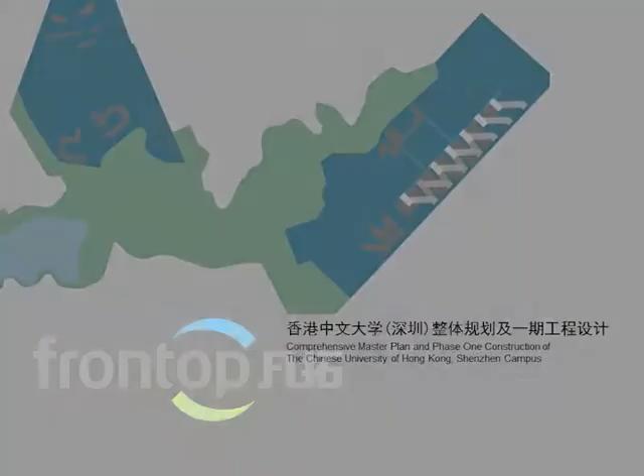This is the presentation for the Comprehensive Master Plan and Phase 1 construction of the Chinese University of Hong Kong, Shenzhen campus. Our aim was to design a campus that reflects the unique culture of the Chinese University and its values.

Our understanding of the Chinese University is that it has a very strong cultural heritage, a culture of college community and communication, and an ecological campus. In addition, we wanted to introduce a culture of creativity and interaction.

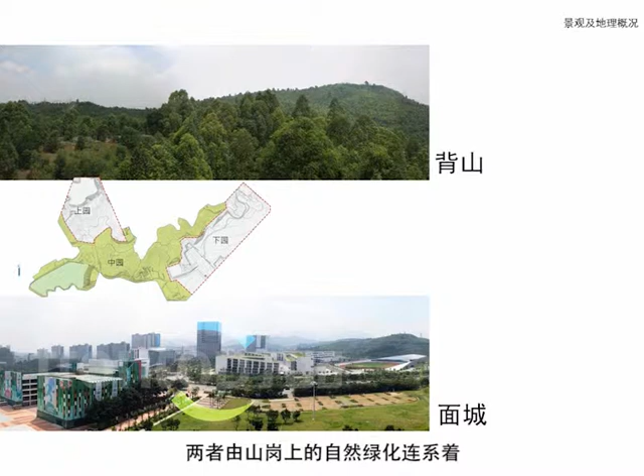The site and its terrain naturally allowed two campus zones, which are fused together with the landscape. The lower campus on the right is backed by hills, and the upper campus on the left sits on top of the hills. The lower campus interacts with the city, and on the other side is surrounded by the serene, natural hillside.

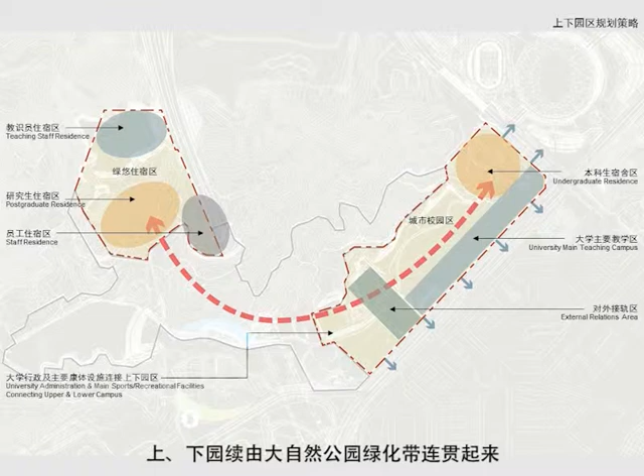This condition allows an ideal programmatic diagram where the upper campus surrounded by nature on top of the hill could be the location of the teaching staff residence, postgraduate college residence, and staff quarters. This allows us to concentrate all of the main teaching facilities and undergrad campus in the lower areas. The upper and lower zones are then bound together with a natural terrain green link. The master plan proposal therefore optimizes the use of the urban context.

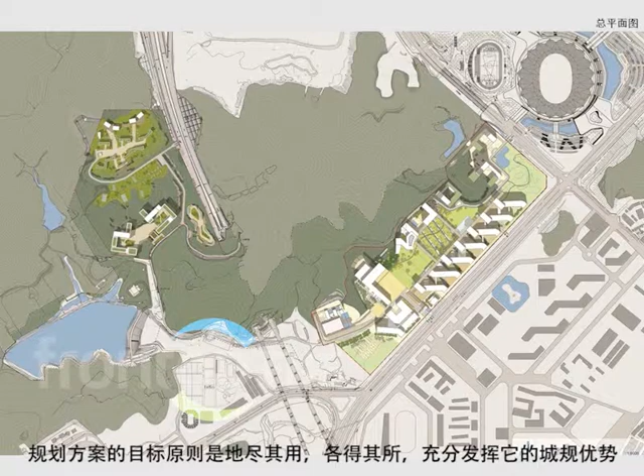Our concept can be described in a tripartite sectional zones: the natural green terrain, the campus green, and the academic cluster.

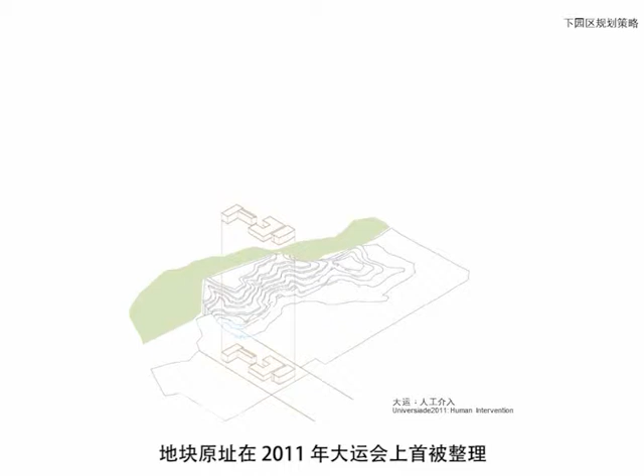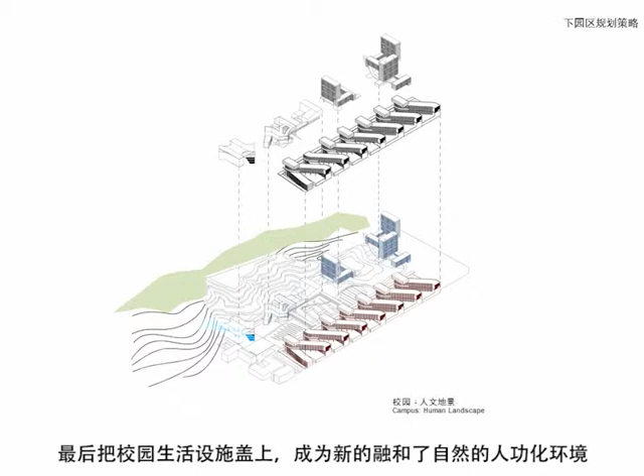The diagram of architectural intervention started with the Universiade 2011 structures. Our proposal extends the campus grid with a series of interconnected green landscape and axes, and then overlays the campus facilities, forming a human landscape.

The diagrammatic components of the campus facilities consists of the main teaching blocks, which is arranged in a weaving layout, more on this later, and the faculty office blocks on top.

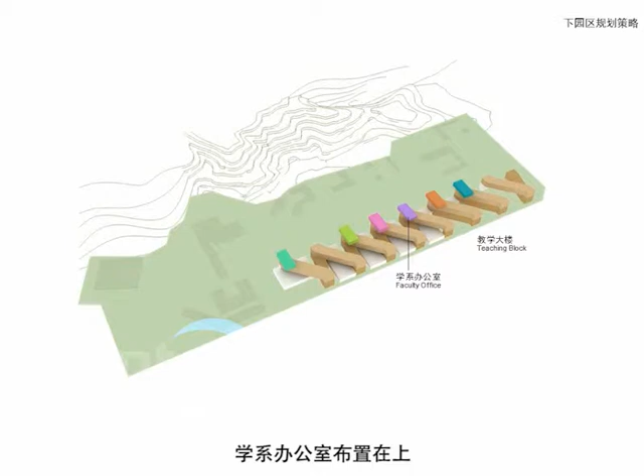And a series of pavilions, which includes the indoor sports facility, the administration block, main hall, library, multidisciplinary center at the heart of the development in phases 1 and 2, the internal street, which forms the spine and a loop around the multidisciplinary center, and the college residence.

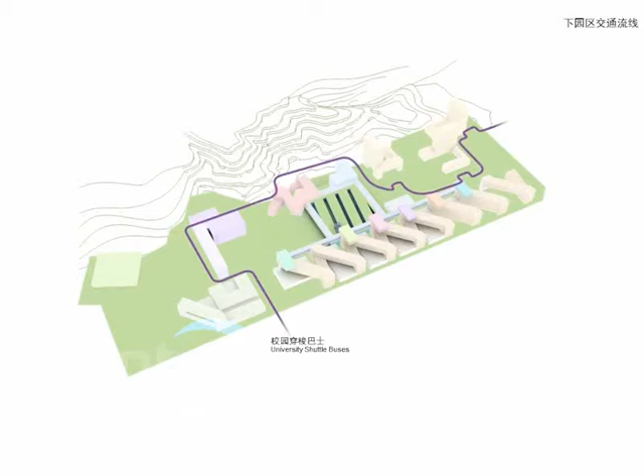There are three main access points to the campus: the main entrance avenue for the visitors and drop-off, private vehicle and goods and services entrance below the teaching blocks, and the shuttle bus and bicycle entrance en route.

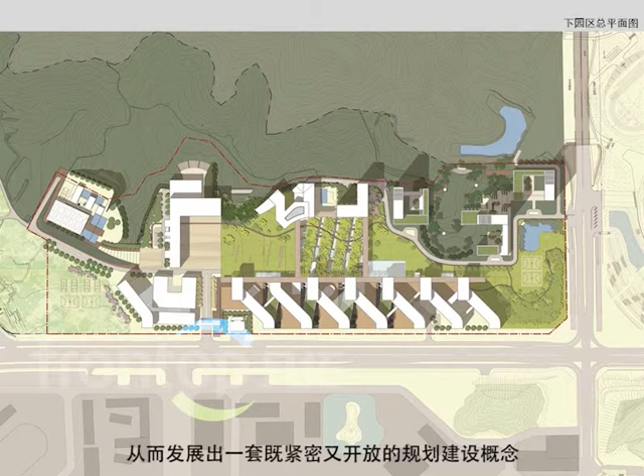The advantage of this arrangement is that it allows for future expansion and creates a master plan that is enclosed yet open, and a simple linear arrangement that works with the terrain.

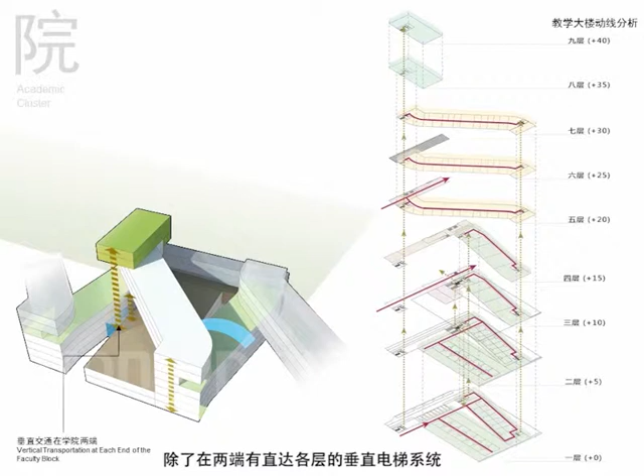The teaching blocks of the academic cluster are arranged in an interlocking weaving pattern, which allows vertical transportation at the hinge points and creates open gaps which allow cross-ventilation and interconnection between different faculties.

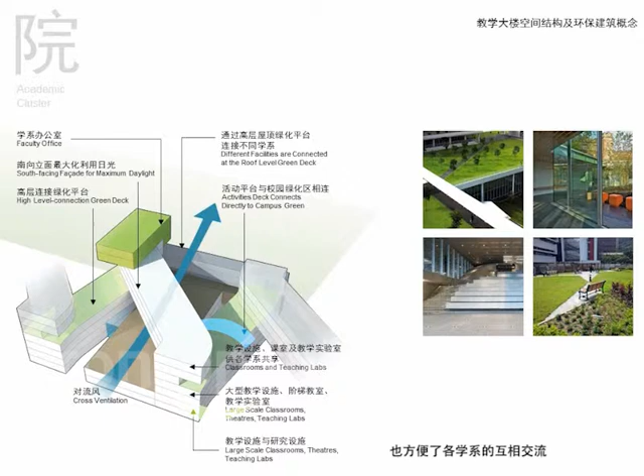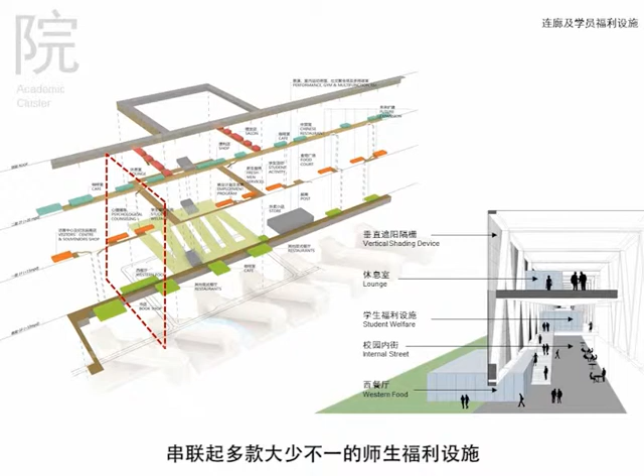To enhance this connection further, the loop and spine street corridor on multiple levels strings together all the amenities like student welfare office and canteens. These spaces would encourage interaction and cross-faculty communication.

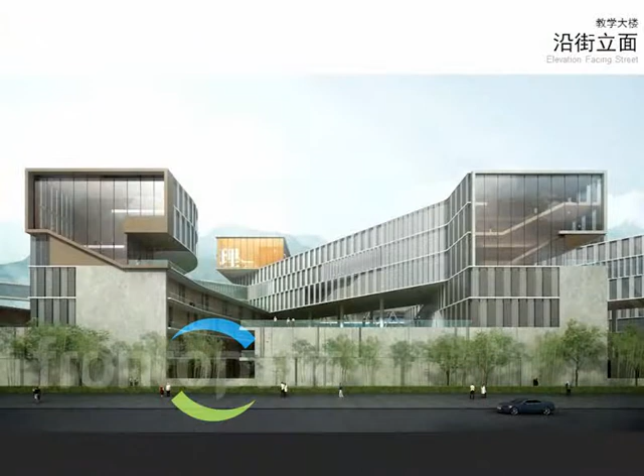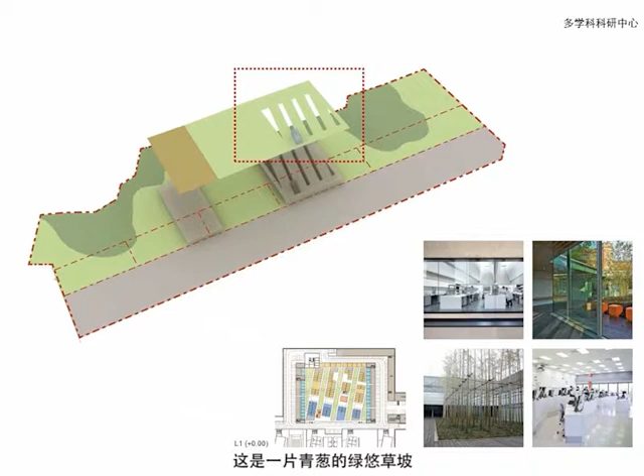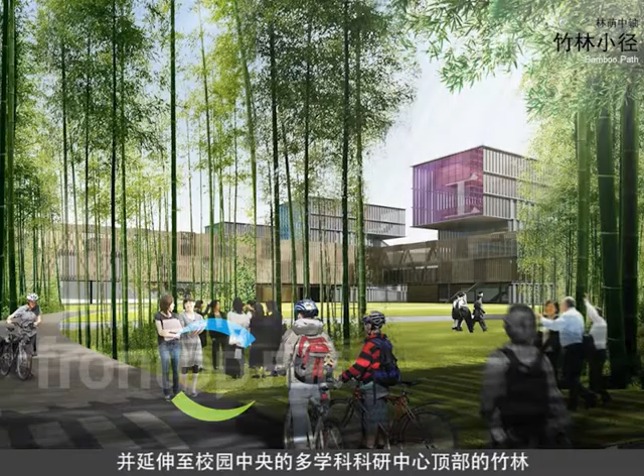The green campus is the second zone along the center of the campus. This is a sloping terrain which slopes up from the main entrance plaza and covers the roof of the multidisciplinary center with a central campus green.

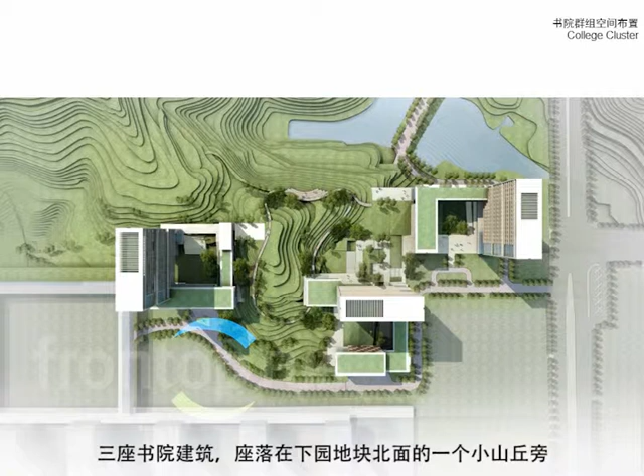The college residences are ideally located at the base of the hill to take advantage of the natural landscape. The arrangement of the 3 college residences respond to the natural terrain by interlocking and embracing the hill.

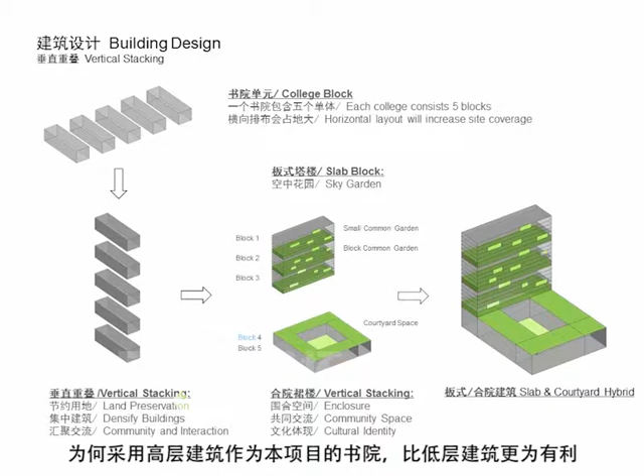This diagram illustrates the vertical stacking diagram and the reason why a cost-effective tower block model was chosen instead of a low-rise. Each college residence consists of 5 blocks, and a low-rise option will require larger site coverage, which means more cut and fill on site, which is less environmentally friendly.

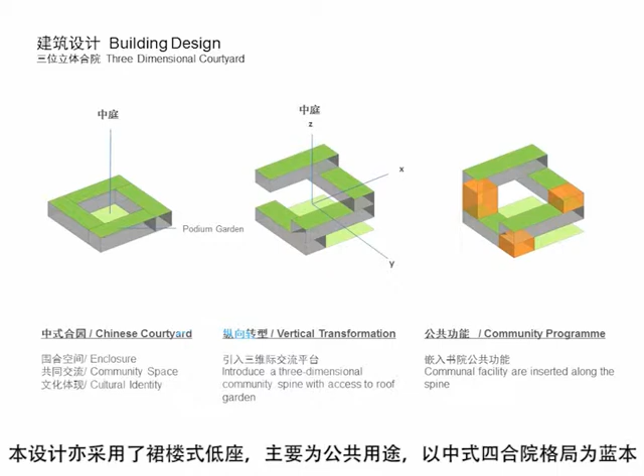The lower block is a spatial variation on the traditional Chinese courtyard. The result is that the arrangement of the college residences respond to the natural terrain and works with the natural environment.

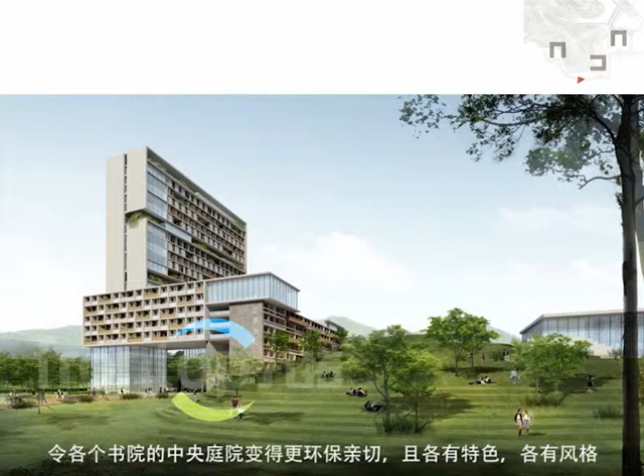The vertical blocks and courtyards allow the natural terrain to flow into the central green campus zone, which is much more environmentally friendly than an expansive site coverage using low-rise.

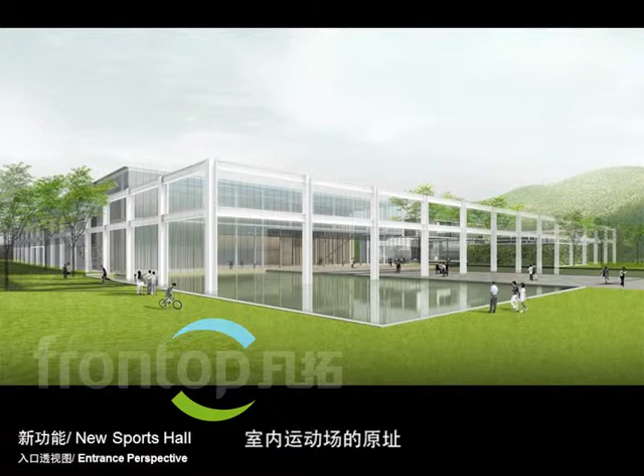The new sports hall is actually the partial reuse of an existing building structure frame. The new program is inserted as blocks between the old structure.

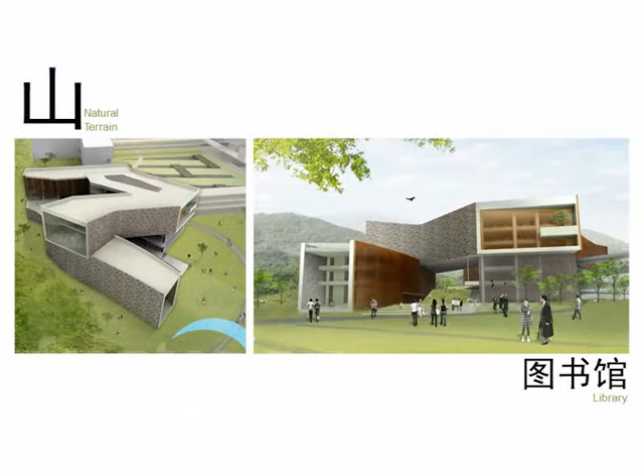The library pavilion design allows the visual and spatial connection between the hill, the campus green, and teaching blocks. The interlocking form creates a series of interior and external spaces forming courtyards, atria, and library aisles.

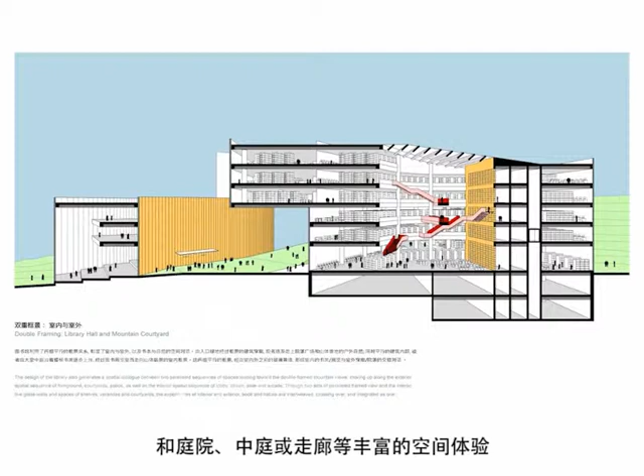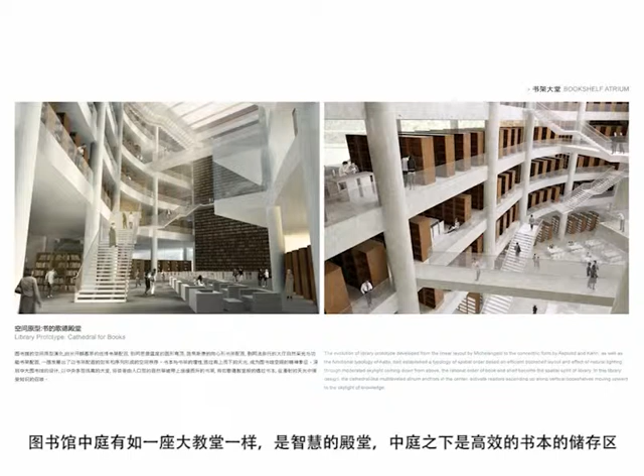The ends of each linear blocks are reading rooms with panoramic views of natural green. The main atria creates a cathedral-like space which belies a machine-like efficiency for book storage and expansion. The facade allows filtered light to enter through shading device, and diffuse lighting is provided.